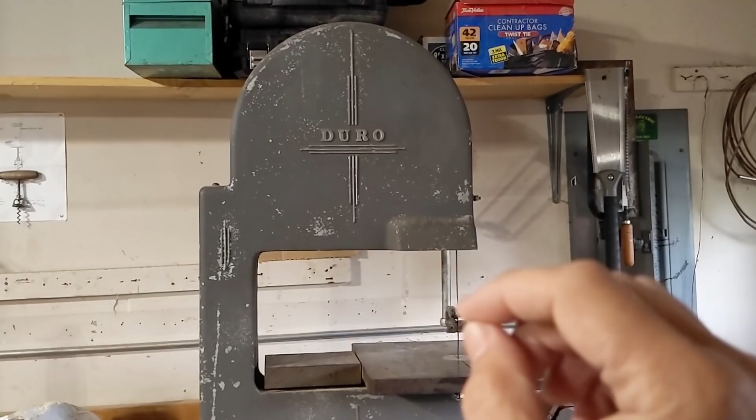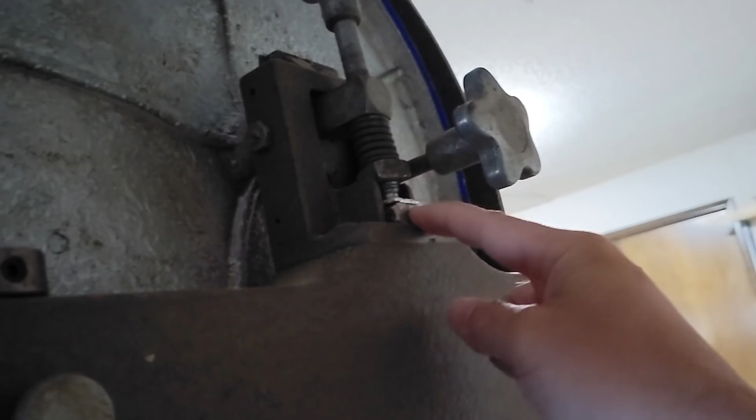I picked up this old Duro bandsaw project from somebody else, and that guy didn't do a very good job of it. He ordered bandsaw tires that are not quite strong enough, so it's easy to move them across the wheel. Also, these wheels are already crowned and the metal is fine, so I really don't need these tires. The problem is the blade length for this old Duro is 101.5 to 102.5 inches, so 102 inches would be ideal, and that's harder to find - it's not a standard blade length anymore. So I can understand why he got a blade that's too long, and he's had to put spacer blocks back behind there to get this wheel up, which has really thrown things off. So pretty much everything he did to get this bandsaw working needs to come out and be replaced.

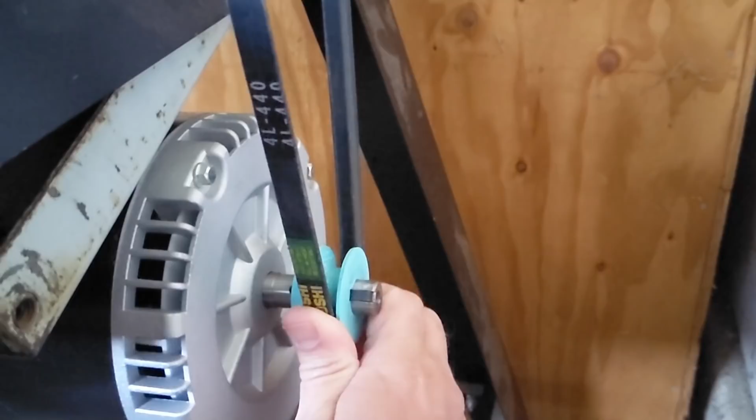He had a 1 horsepower motor, which was not nearly powerful enough, and I've replaced it with a Harbor Freight 3 horsepower motor, which required me to print up this small pulley. The RPM on this motor is about 3,700, so it's twice as fast as the last one. With this smaller pulley going to the larger pulley, I think I'll get a decent speed out of this bandsaw, about the speed I want.

In the future, I might 3D print a side-by-side pulley so I have 2 speed options. We'll see. But for now, this is it, and I need to do some testing, which means I need to wire up this motor. This is what I'm working with.

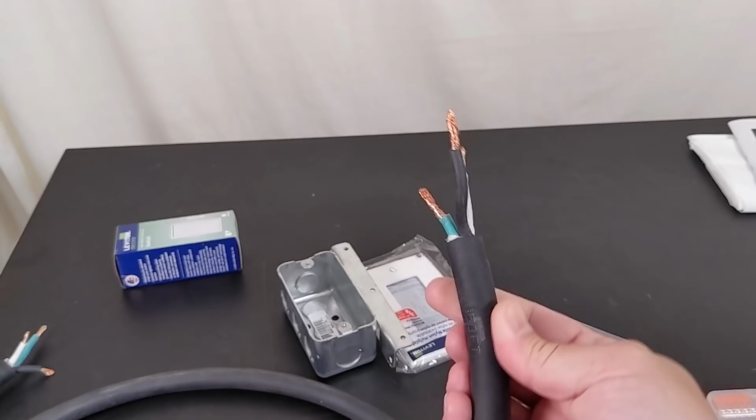I have 10 feet of 10 gauge 4-wire, like 220 volt soft wire. This is actually repurposed, and currently Home Depot is out of this stuff with no resupply in sight, so it must be another casualty of the pandemic. I don't know. So I'm going to have to get this stuff mounted.

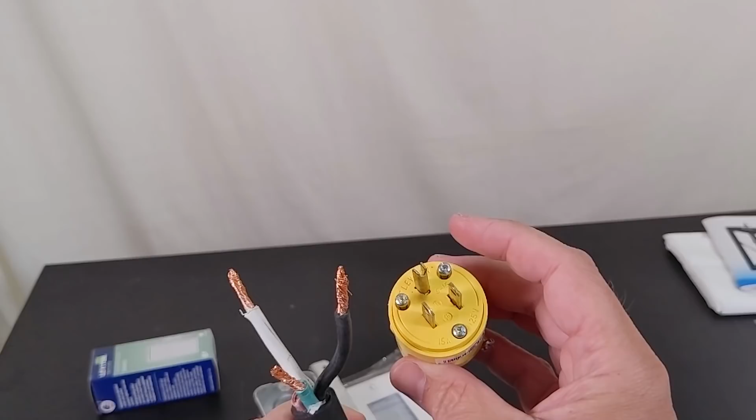Now I only need 3 of the wires, so I've got a 3-wire connector here. This is going to go into a 110 volt circuit. I've got this nice metal box here to hold the switch, and one of these rocker switches, which was pretty cheap - just like a standard rocker switch for your home, like the ones you've all seen for turning lights on and off. Why I chose this style of switch instead of the other style should become apparent pretty shortly.

The final thing to talk about here is the wire nuts - about $2.78. This is the classic way of doing it, but I'm not going to use these because I got my lever nuts in the mail.

These lever nuts are awesome, just super sweet for doing any sort of home electrical work. I think these are much more prevalent out there in Europe, but here in the United States we're just starting to see these being used, and they provide all the current ability - you can pass just as much amperage through these connectors as you can with a wire nut, and they're so easy to connect. You just pop the levers up, stick the wire into the hole, pop the lever down, and you're done.

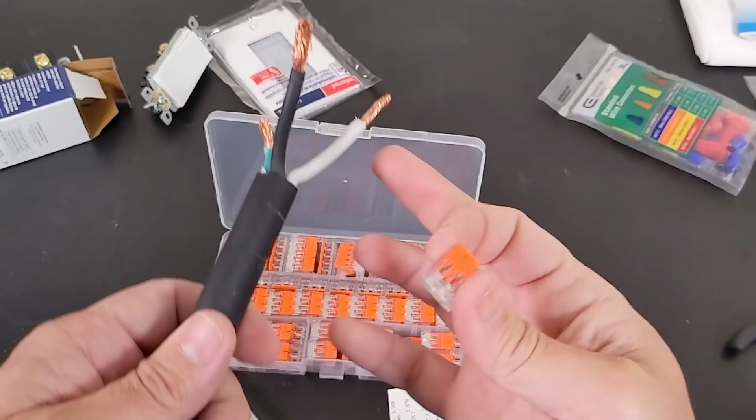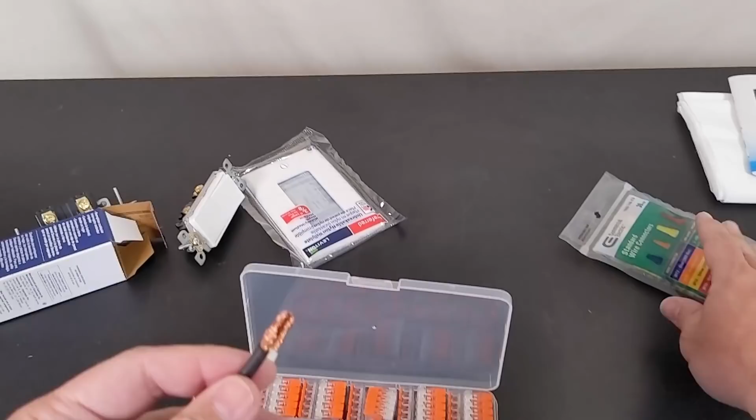Super, super clean. But these aren't going to work because I'm using 10 gauge wire here, and the lever nuts I bought are for 12 gauge and smaller. So I can't get these wires down inside of there, and I'm not about to trim them down just so they fit into the nut. I guess I'll be using these old twist nut standard wire connectors.

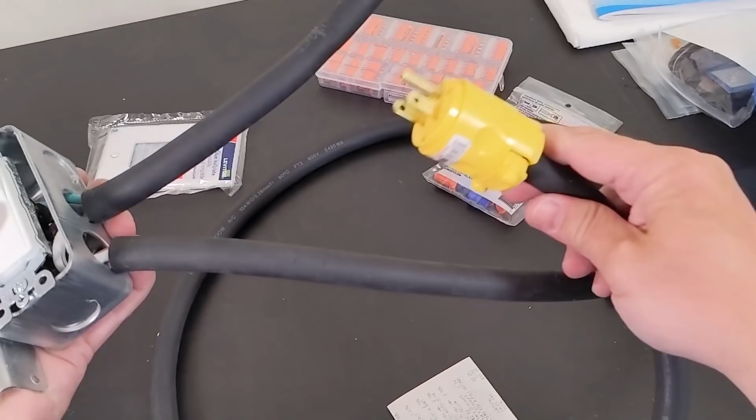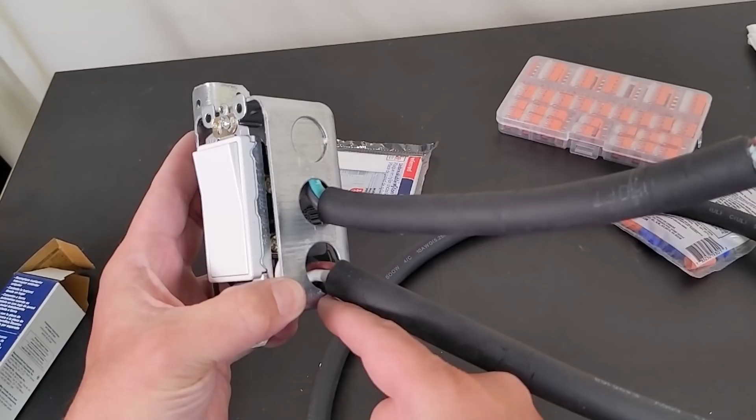All right, I got the switch in the box, all wired up. Got the pigtail here to go to the motor, and this other end goes to a nice 110 volt plug. This whole thing is going onto a bandsaw with a motor that moves, and there's going to be vibrations. This is a nice sharp metal edge with a wire that can vibrate and cut right into that edge, so that edge will cut right through the insulation on the wires and short circuit that thing. That would not be good. So what I'm going to do is 3D print a piece that pinches these 2 cables and prevents them from being vibrated until the metal cuts into them.

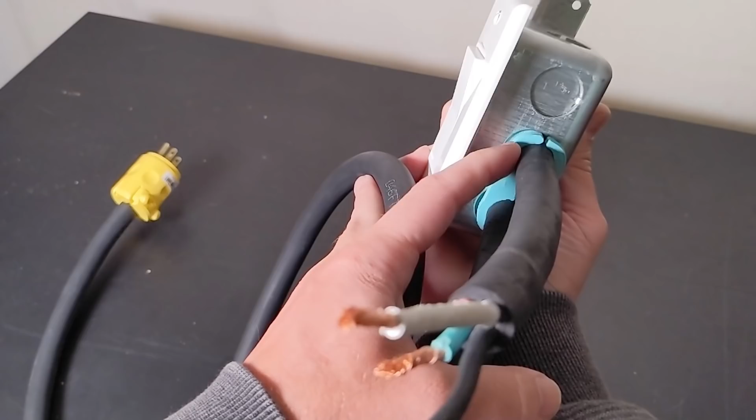I don't like my wire strain relief here - you can see it's not centered in the hole, which means the wire insulation is pressing up against the side of that metal box, and that's not good. So I need to remake the blue component here to provide proper strain relief to the wiring. This outer plate is going to get replaced by a 3D printed component. I mostly bought this because I needed those 2 screws.

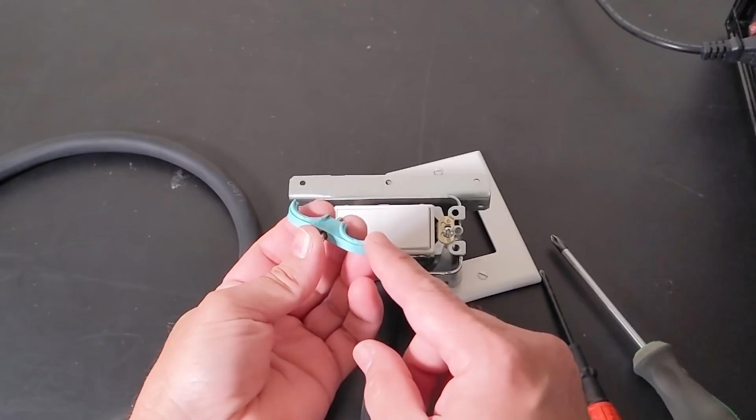This is the first design where the flange is the same thickness as that metal wall, and this is the replacement where the flange is much more thick. Now the wires are applying constant pressure, pushing this towards the outside, so it's not going to rattle in this direction, but it will rattle up and down in the holes, and that's what I want to prevent. Yeah, that's much better.

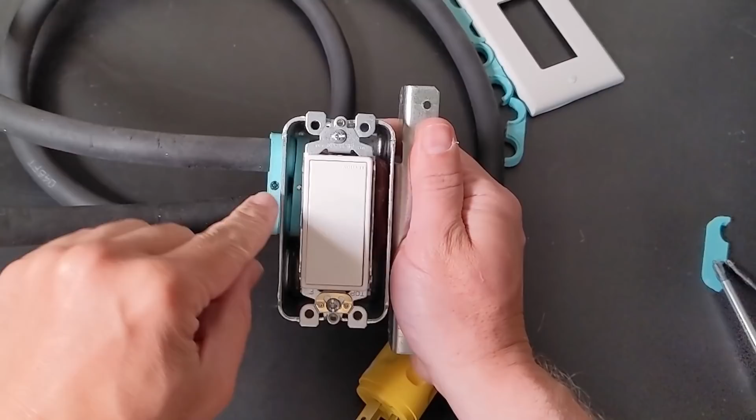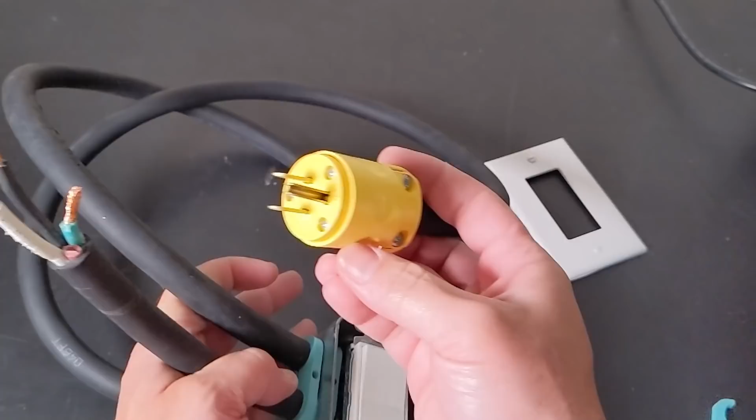You guys can see only the blue plastic is touching the metal, and there's really no movement. It doesn't move. It's a little bit cockeyed, that's because of the pressure from the wires inside of there, but I've tested the continuity with a circuit checker, and it's all good. The next thing to do is come up with a custom switch plate, and you're looking at what I came up with in CAD right there.

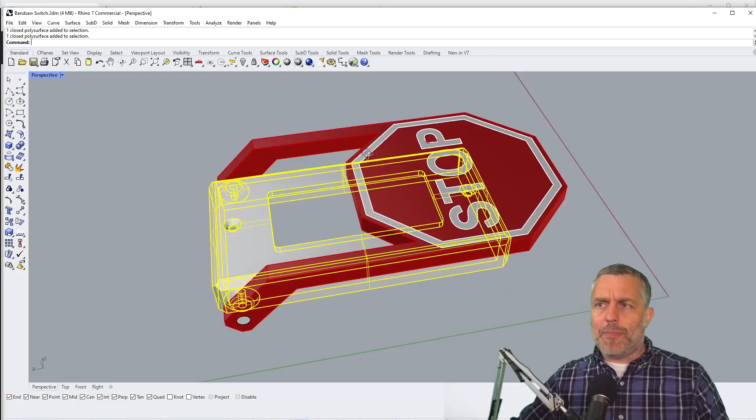So if I zoom around on this, you can see that the stop sign can pivot around the screws right there, and this thing prints in 3 pieces. Basically, you print this one all by itself, and then you print the stop and that outline. It's just 2 layers thick. So you print that and you leave it on the printer, you don't pull it off, and then you run a separate whole print being the red geometry here. And so the stop ends up being embedded in the red, and it just looks really nice.

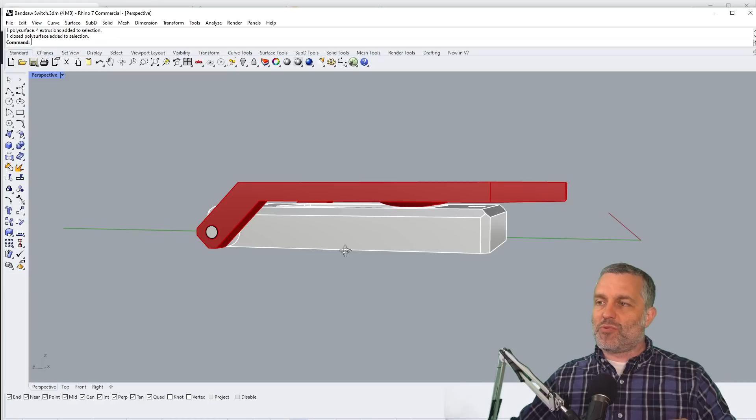You can see that the red has this bumped out portion down here, and that really just helps to activate the switch as I've designed it. And you can see also the geometry for my cable relief over there.

Okay, so I've uploaded this geometry to Thangs, and you can scroll around it. Really cool functionality that I showed you guys in Thangs before, and I was able to upload it as a step file, which allows me to have this functionality on the Thangs website. Really cool. So this is just available. Just search for stop sign switch, or go to design prototype tests, or find my username on the Thangs website, and you should be able to download this and use it yourself.

Now, I do need to say that this will only work on that same metal box that I have. So head into Home Depot, which is where I got it, and I'm sure they're going to have that same box in stock. But if you don't have a Home Depot near you, I don't know. It's kind of a narrower metal box, so that whole plate isn't going to be largely compatible with other things.

Now, the key here is that these switches are available elsewhere. Look at this ready-made version of it, enclosed plastic box, big old stop sign. I don't think it looks nearly as nice as mine does, but it's got all the functionality. The wiring is a lot smaller, so you're not going to be able to put custom gauge wiring in there. I don't know how many amps this is rated to, so you've got issues with these. Also, a big old price tag, $51 for that one.

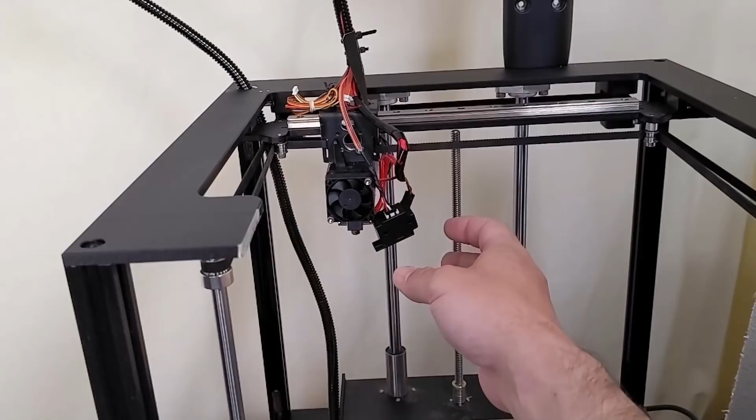This is meant to be printed in one go, but I printed this on my little Core XY machine, and it doesn't currently have part cooling on it, which means that I had some pretty severe problems with part peeling. So these ears here, I had to reprint and then just use a soldering iron to blend them into the original print that I had cut off.

All right, it's all done. Let's show these guys what we're working with. I used some Sharpie to color the top of the switch green, the bottom of the switch red. I've 3D printed this part here and the stop sign.

And hey, buddy, will you show these people how it works? Yeah. Okay, hit the stop sign. Turn it back on. There you go. And that's as simple as that.

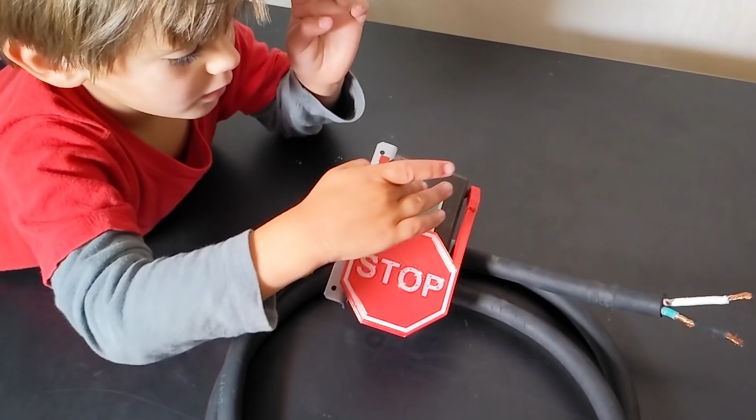I think it's good to have. I want to have one of these. I need to make something with it. Okay, but this doesn't make things, this just turns the machine on that makes the things. So maybe you can use your 3D printer to make things instead. No, the other bundle that you gave me, it doesn't work. The printer I gave you doesn't work? Yeah, so that's why I want this. I understand. Well, I'll tell you what, I'll make one for you. Of this? Yeah. Oh.

Now, Dad? Yeah. Can you draw green and red because I love, and can you put a stop sign on there? Because I love the stop sign and the switches, and I love the pipes and the wires. Uh-huh, so I want you to make it just like the wires and the tubes. Okay, I'll do my best. Okay, do your best. Thanks, buddy.

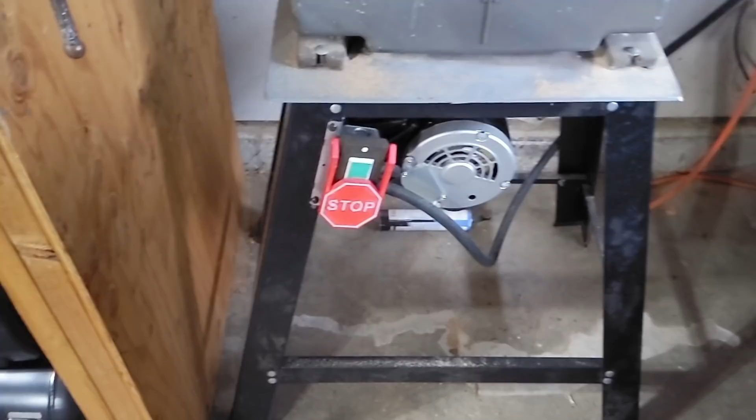Ta-da! There it is, working fantastically. It's a little bit noisy, but here, I'll turn it on for you guys.

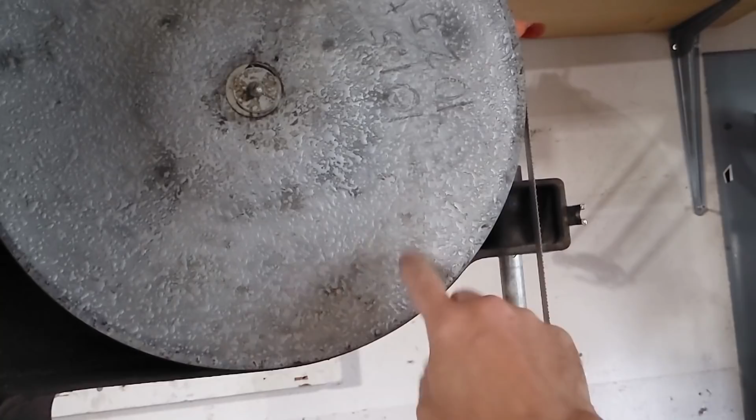This is right there at my knee height. This is the quality of cut that I'm getting. Pretty good, brand new blade. This is a hybrid style blade that I got from McMaster Carr. And you can see that I'm running this on the stock wheels, the old metal wheels that came on this thing. They are crowned, they're metal, and they're crowned, so they're going to be kind of noisy.

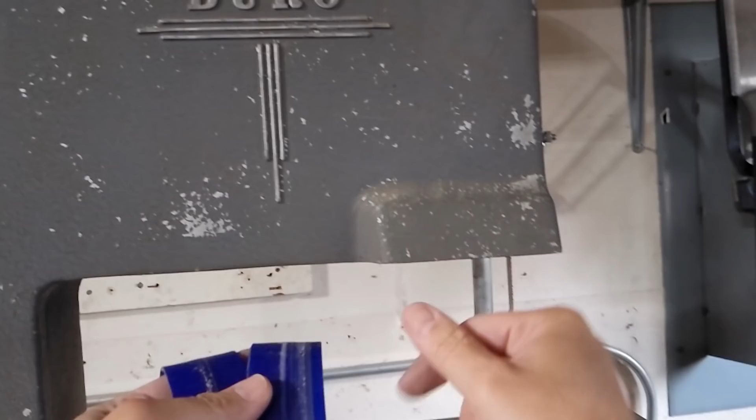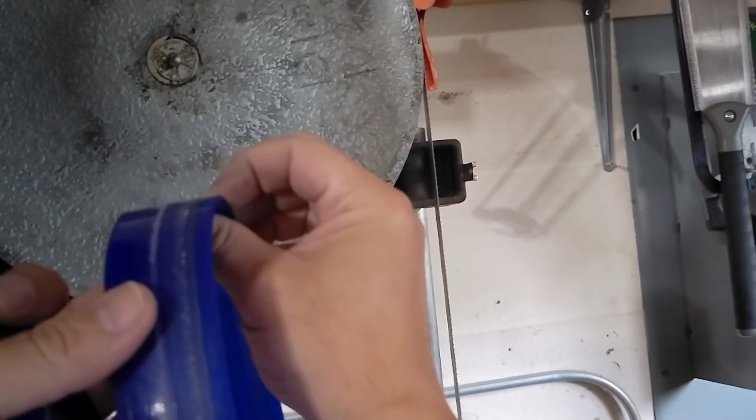But the tires that the previous owner who tried to renovate this thing put on the machine don't really stay on it, and they're wider than the actual wheels, and they migrate because this is already crowned. So the tires themselves are crowned, and so you've got a double crowning thing happening, which isn't good. So I'm just going to leave it real noisy like this. I could stretch a bicycle inner tube across the wheels here, but the problem with that is I would not be able to cut metal, and I do plan on cutting aluminum from time to time. This blade is supposed to handle both wood and aluminum.

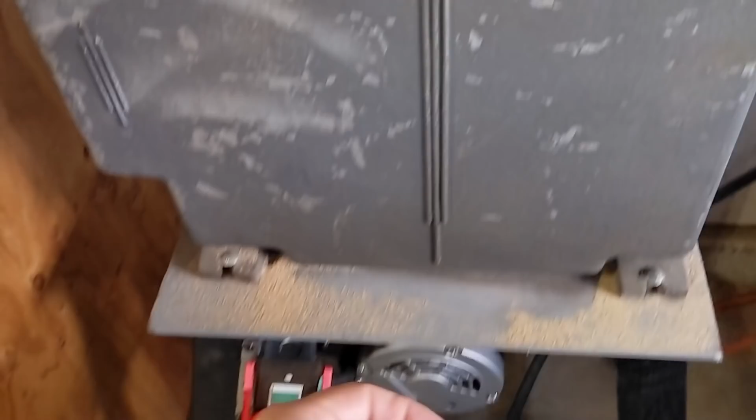So you guys just saw me really bog down the blade and bring it to a near stop, which is really taxing on the motor. And if I was going to trip the breaker, that should have done it.

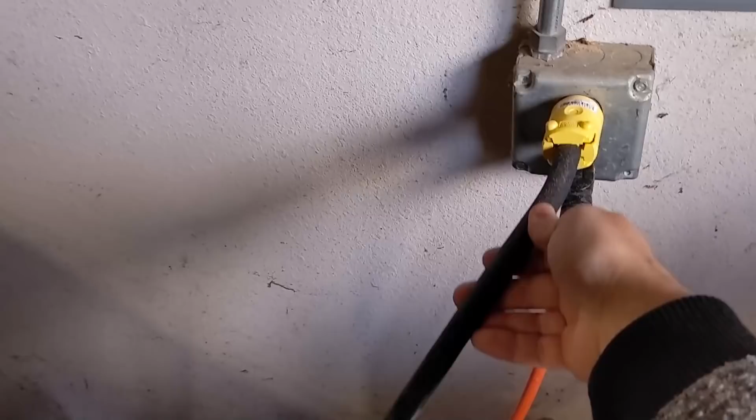So here's the saw, and there is the 20 amp circuit breaker in the box. There's the plug, but the line is longer than from the box to there because it goes down there somewhere. So we've got a good 20 feet of wiring inside the wall, on top of 9 feet of 10 AWG wiring here to the saw itself. And here's the manual that came with the motor. So the wiring diagram for this one, the 3 horsepower motor, is that.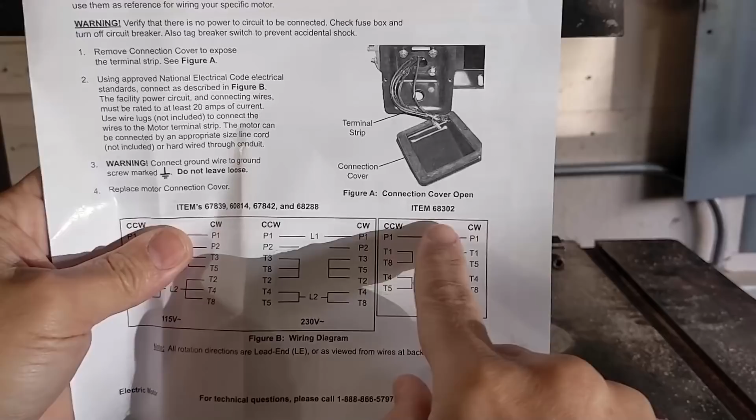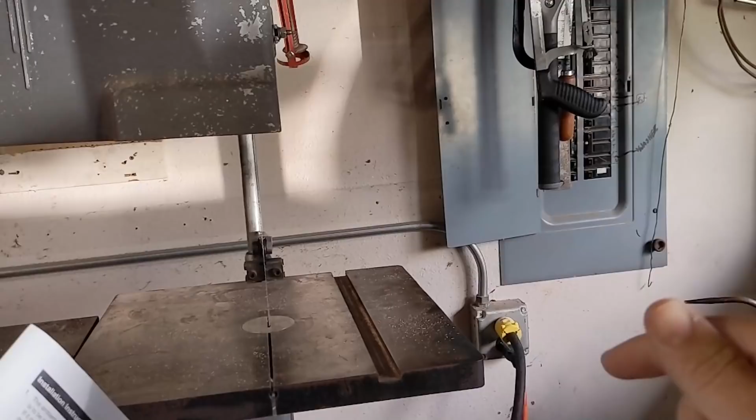And you can see this is meant for 230 volts, while I'm running it on 120 volts AC. And a quick note about that: 110 volts AC was the original standard proposed by Nikola Tesla. And Westinghouse, who was then embattled with Edison, eventually won. The Westinghouse-Tesla version of AC power delivery to homes won because it is the superior way to do it. But Westinghouse wanted it to be 133 volts, which is funny. So yeah, there's always been kind of arguments over the nuances there.

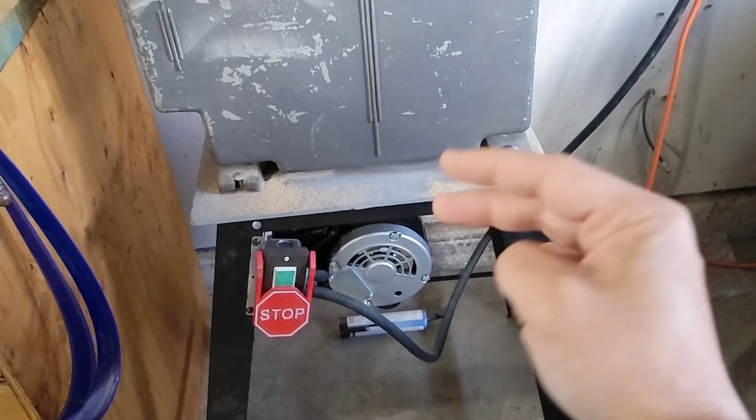So in America, we now have between 110 and 120 volts AC coming out of most of our outlets, although you can get 220 volt AC to your shop, and they even have 3-phase 220 volt, which is Nikola Tesla's baby. That was his invention, and also the better way to run things, which is why the best shop equipment always is 3-phase 220. So yeah, this motor is designed for 2-wire 230 volts, not 240, 230 volt AC, and yet I've shown that it's working just fine on a 20 amp 120 volt circuit.

Why am I not having big problems? And also, am I getting half the power out of that motor because I'm only feeding it half the voltage? To answer those questions, we've got to fall back on the most basic equation in electricity, and that is voltage times amperage equals wattage. This motor, we know, is supposed to run at 230 volts. If we look on the website, we can see this is rated at 12.26 amps, which gives us a wattage of rounded 2820.

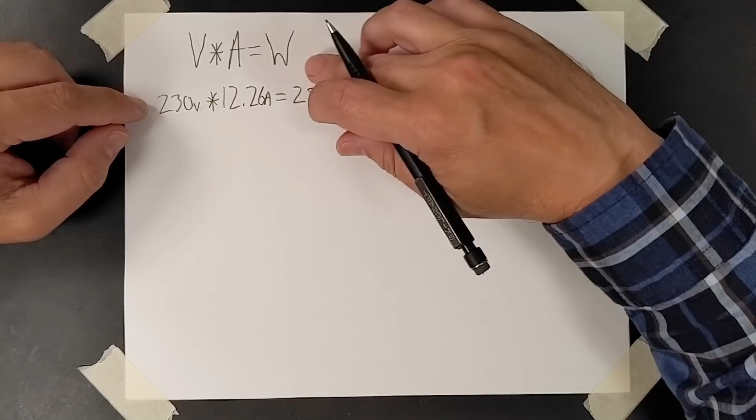Now, the thing to understand about an electric AC motor is that it pulls electricity through the circuit, it doesn't get pushed by the electricity. So you can't decrease the voltage and think that the amperage is going to stay the same and therefore the wattage is going to decrease. That doesn't work like that. The motor is going to demand all the electricity that it's rated at. So if it's rated at 2820 watts, that's how many watts it's going to pull, no matter if you're running it at 230 volts or at 120 volts.

So if we change the variable to 120 volts here, and we multiply that by an unknown amperage, it equals 2820 watts.

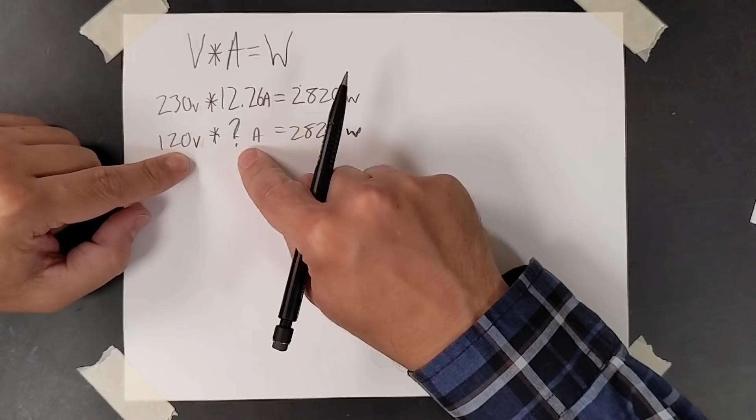Well, we can just divide 2820 by 120 volts to get our amperage, and that comes out to be 23.5 amps. That is more than the circuit is rated at. The circuit's only rated at 20 amps. So not only are we exceeding the rating of the circuit, at least the rating of the circuit breaker.

I don't know what wiring they put back there behind the wall, the Romex cabling going from the circuit breaker to the plug. I did use some very stout 10 AWG, 10 gauge wiring from the outlet to the saw. But who knows what the wiring is? Who knows what the actual circuit can handle? The circuit breaker itself is rated at 20 amps.

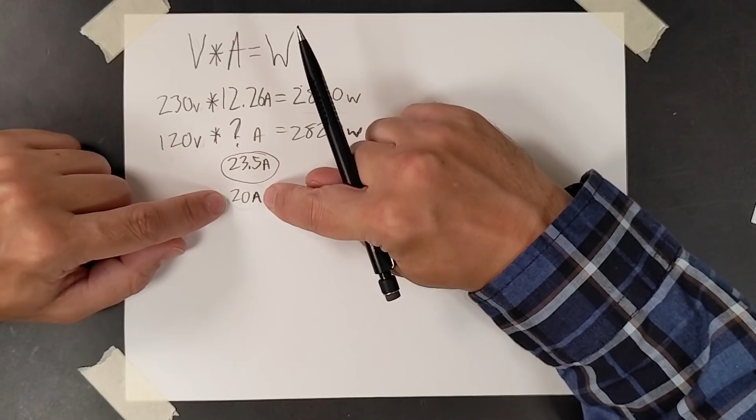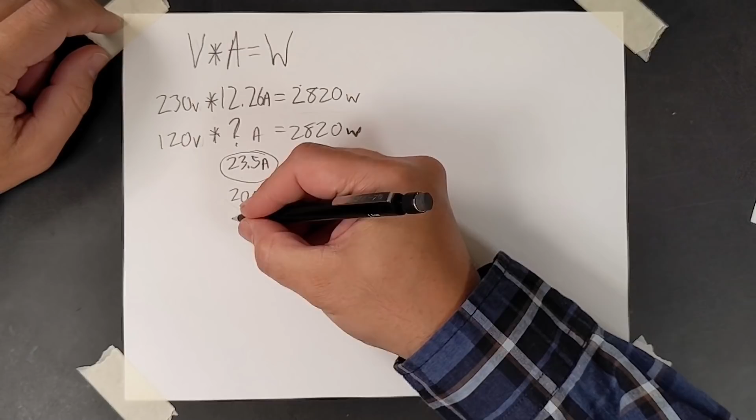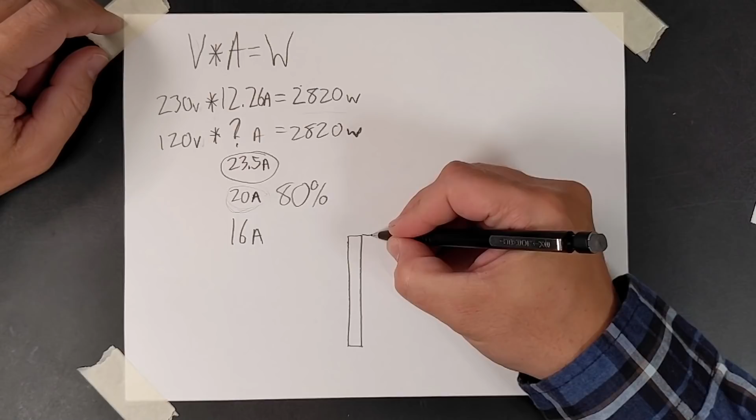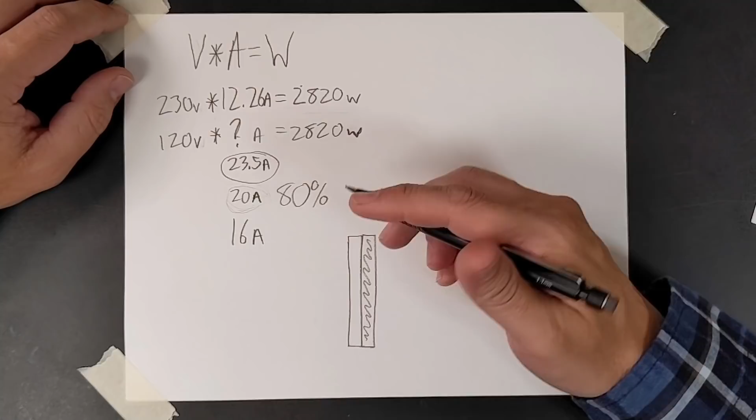The general principle of a circuit breaker is that you have two metals and they're bonded together, and one of them expands more in the heat. Putting electricity through a circuit will heat up the wires in it. Before they get red hot, they do expand quite a bit. So if we bond two pieces of metal side by side, one of which expands more than the other, then what will happen is you'll get a bend. Because as this outer one here expands more, it's got to travel a further distance than that. And so it's going to warp over.

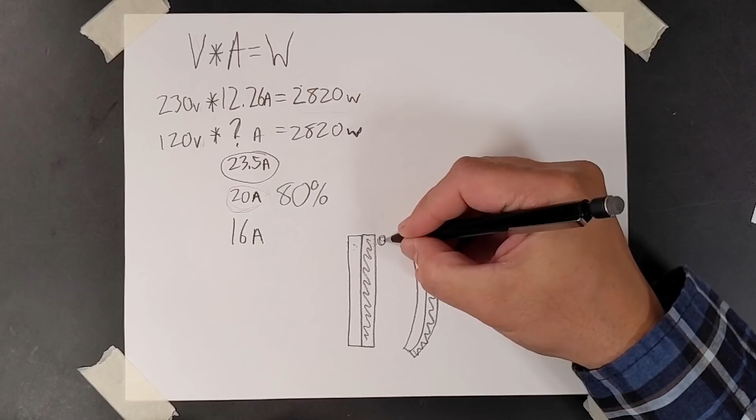You basically have a contact point here, and as it expands, it moves away from the contact point, so you no longer have electricity flowing. There's no place for it to flow because it's not making contact. So it takes time for the metal to heat up.

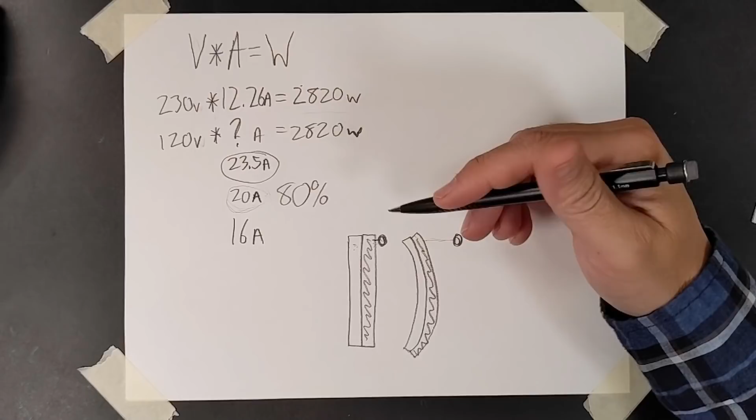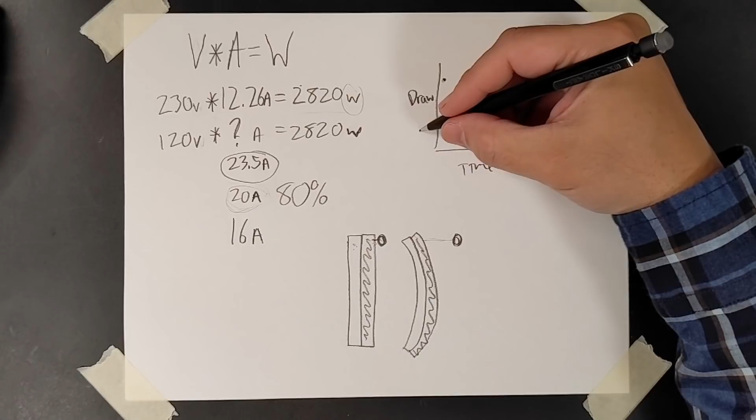So that can explain why instantaneously we don't just trip the circuit as soon as we try to draw this overrated wattage through it. And that's actually a good thing, that it doesn't instantly trip the second you draw more wattage than it's rated for, because electric motors on startup have a really high power draw. So if this is the time and this is the draw, they start off way higher than what they're rated at, and that very quickly diminishes in a parabolic fashion as the motor speeds up.

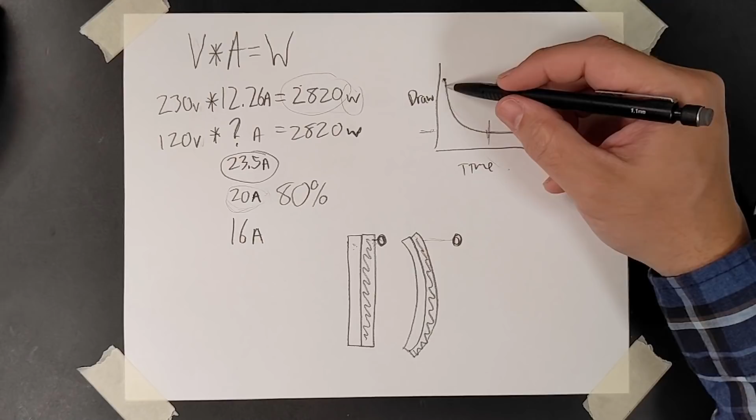As it gets to about full speed, it's going to draw the rated 2820 watts across there. But until that, there's a spike, and this spike doesn't last very long, but it's definitely there. So you wouldn't want your circuit breaker to instantly trip the second you drew instantaneously more than the wattage. So the fact that there's a delay on that is a good thing in general, but I'm definitely abusing that circuit.

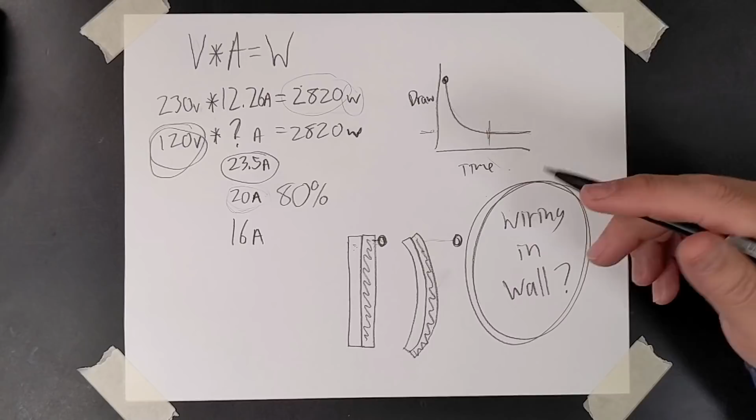Even though the circuit breaker's not tripping, we don't know the wiring that's in the walls. So that means I could really be overheating, just like the circuit breaker gets overheated. The actual wiring in the wall could be heating up and it could catch on fire inside of the wall cavity. Back to the 80% rule, I really don't want to be running this over 16 amps.

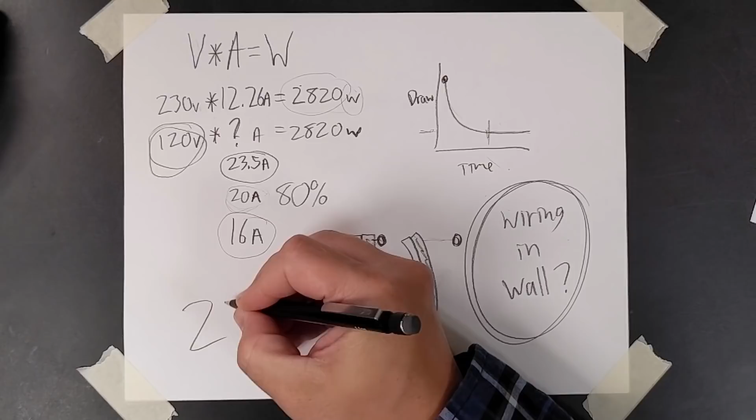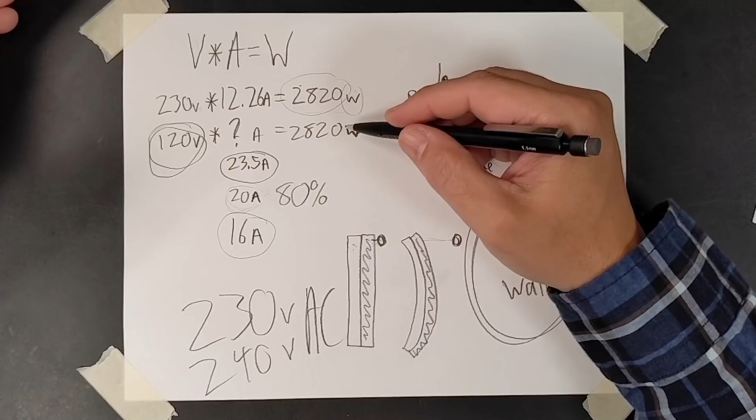So I absolutely must run this motor on 230 or 240 volts AC to do it right. There's nothing reasonable that I can do to lower the draw of the motor. It's fundamentally built into the motor that it's going to demand 2820 watts, which equates at 120 volts to 23.5 amps. I can't do anything to lower that draw of the motor.

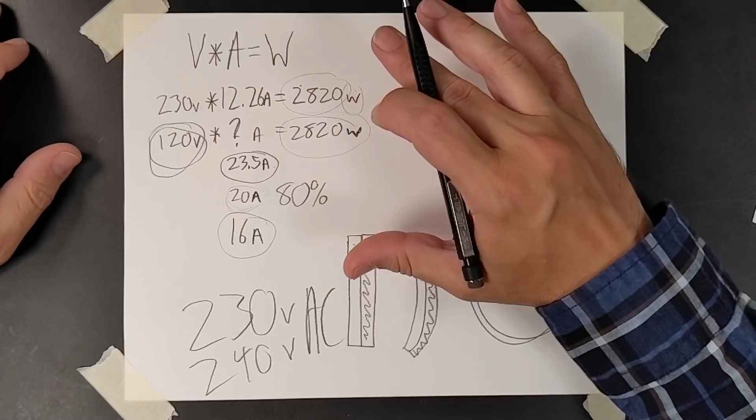I need to put a different motor on there, and the motor I had on there previously wasn't powerful enough. So in order to have the power this saw needs, this 3 horsepower is really quite nice, and it just means that I need 240 volts.

And we can see there's actually quite a number of 240 volt circuits. The range top, all of these heaters, there's radiant ceiling heat in this house. We've got, I don't even know what these are. So yeah, the dryer, all these are 240 volt circuits, but unfortunately every single slot in this panel is taken up.

Normally, you'd have some empty slots, and I'd be able to, if I had two of them, I could easily just wire in an outlet, stick an outlet right here or right there with 12 inches of wiring to plug the bandsaw into.

And I can't do that because this is not my house. I rent here, and the landlord has not really been thrilled about the idea of changing up the wiring. It's a nice house, but he doesn't want to make any changes or help me out in this regard. So, it is what it is.

Here's the thing, you guys. I just ran all of these cuts. These are ripping cuts.

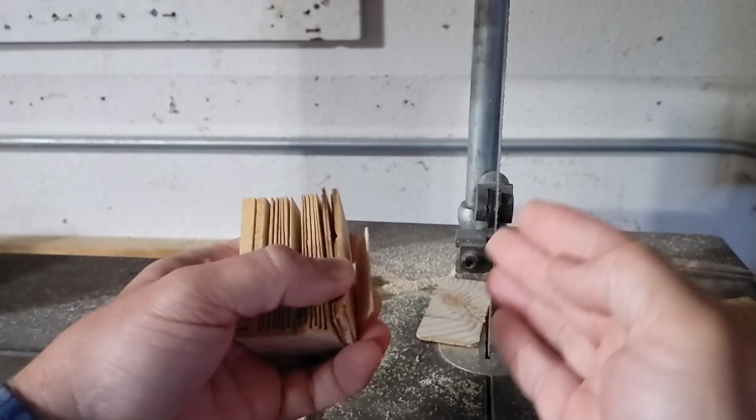These should be harder for the saw to handle than cross grain, and I ran all those cuts back to back. At the very end, I pushed until I bogged the motor down to a full stop, and that did not trip the breaker. Then I turned my air compressor on and did these cross cuts, pushing really fast until I stalled the saw out and stopped the blade.

It took me a few minutes to make all of these cuts, and I'm not seeing an actual real life problem here, especially given that I could run the air compressor on the same circuit, which is going to be drawing a significant amount of power. So why am I not tripping that breaker? It's kind of a mystery.

One possible explanation is that this could be one of those rare instances where low quality Chinese components is a good thing. They claim those wattage numbers, but they could be 25% lower than what they're claiming, which would mean this is only a 2.5 horsepower motor. But hey, it's doing the job—it's cutting quite nicely and it's not popping the circuit breaker.

So I don't have to sweat it that I don't have the right 220 power going to the saw. My final option would be one of these heaters I don't use—like the heater in the laundry room with ceiling heat. I don't know if it has its own circuit or shares one with another room. There's like 1, 2, 3, 4, maybe 6 heat zones. It's hard to tell, so maybe I can use one of those heaters we don't use.

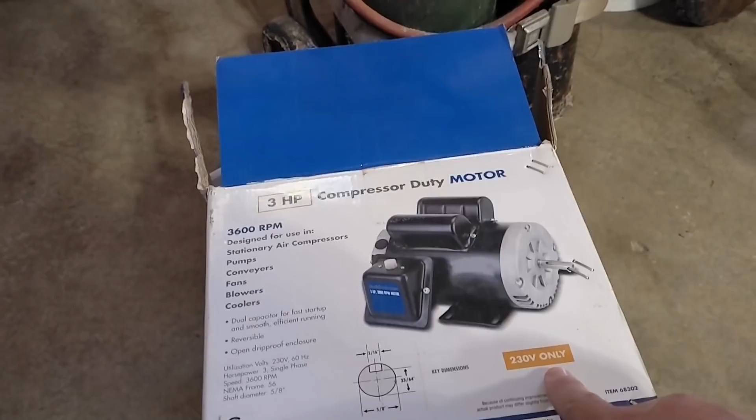So when the box says 230 volts only, it could be that the engineer who designed this motor knew that the maximum circuit you can get for 120 volts AC in America is a 20 amp circuit. He did the math too and knew that 23.5 amps was going to be required with a 120 volt circuit. So that could be why it says this.

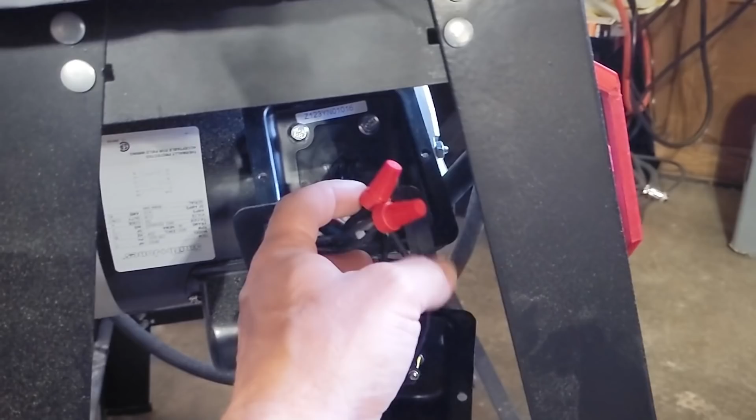Or it could be the wiring right here—the wiring going into the motor itself. You can see my white wire has 2 wires going into it, but the other wire, the black 10 gauge wire, only has a single wire coming from it, and that's dropping down significantly inside. I'd say that's about half the wire gauge there. And then, of course, there's the actual coils, the windings on the motor itself, and maybe those can't handle 23.5 amps.

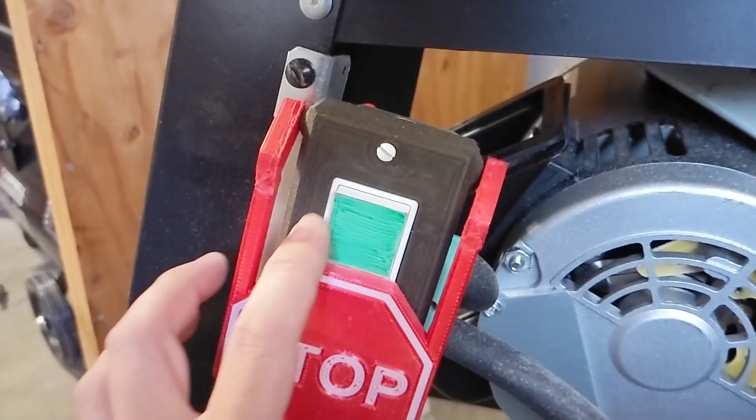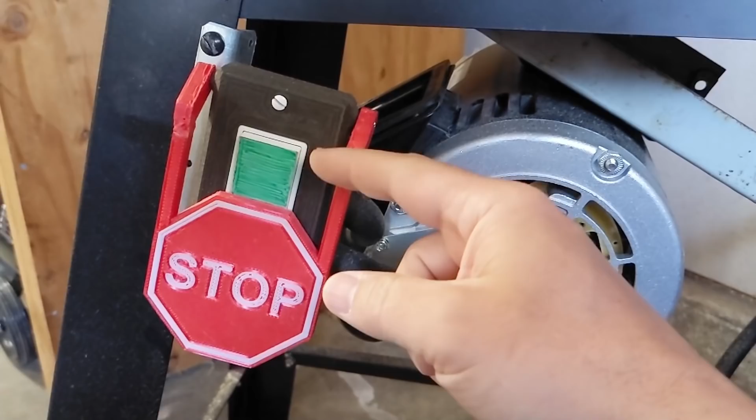Also, what about this switch? This is a 15 amp switch, and I'm currently running 23.5 amps through it. So if I can get 240 volts into the saw, then this will only be running at 12.26 amps, which is well below the rating of the switch, and everything will be good.

But sketchy as this whole electrical experiment has been, the only casualty has been this PLA pulley that I made. So what happened with this pulley here? It's not too hard to figure out.

Basically, it's too small. All these V-groove pulleys have a V shape to them, which corresponds with the V shape on the belt, if you took a cross-section of it. As the belt sits into the groove, it's wedging against the walls of the pulley, so the actual bottom of the pulley doesn't engage with the belt—it's the walls. With this belt, you can see it wants to spring open; it doesn't want to stay in a nice tight form around that pulley, so the belt itself is trying to disengage from the pulley.

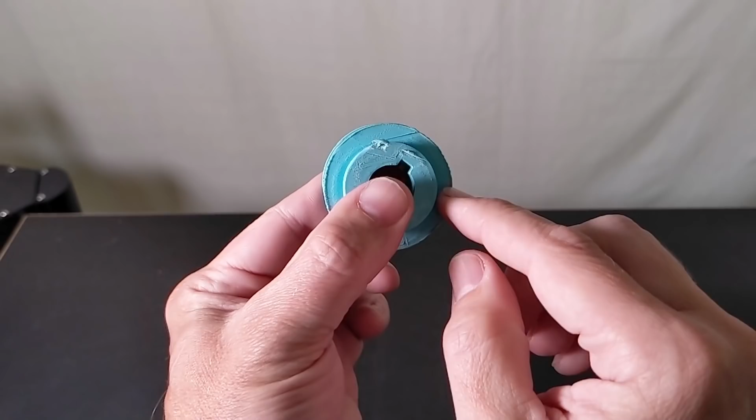Now, the weight of the motor is kind of forcing it around there, but it's not great. Also, because there's just a small pulley here, we don't have much of a contact patch for that belt. The contact patch is always going to be roughly half the circumference of the pulley, and in this case, being a really small pulley, that's a really small contact patch. So a larger pulley would make for a larger contact patch.

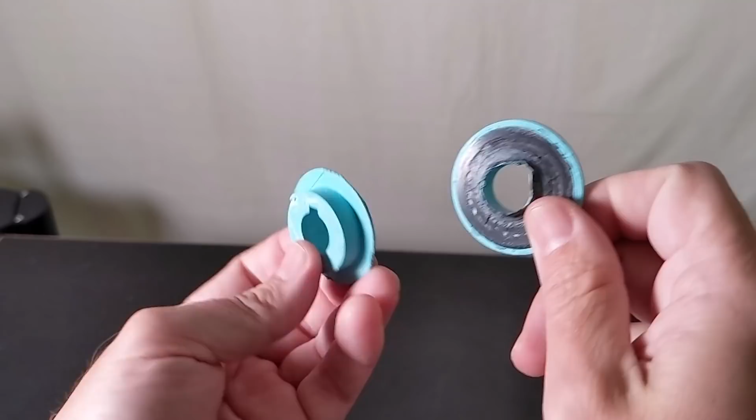I suspect that even if I got a metal pulley at this size, I'm still going to get that slippage, which won't destroy my pulley since it's metal instead of PLA plastic, but it will destroy belts. So what can I do about this? Well, my first inclination was to reprint the part with some carbon fiber impregnated nylon filament. I've got that fancy all metal printer going, and I can get really fancy and make a much more structural pulley, but this was never supposed to be a final product—it was a test to see if I liked the saw speed with this small of a pulley.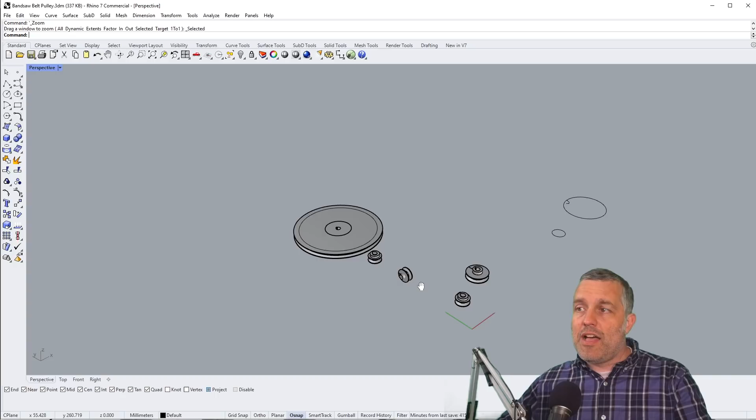More than that, it revealed that I'm going to get slippage on a tiny little pulley like this. So I could redraw this pulley, make it bigger, and print it with a really high temperature filament like polycarbonate, or even carbon fiber polycarbonate. That's pretty fancy, it would probably survive just fine. But that's some expensive filament.

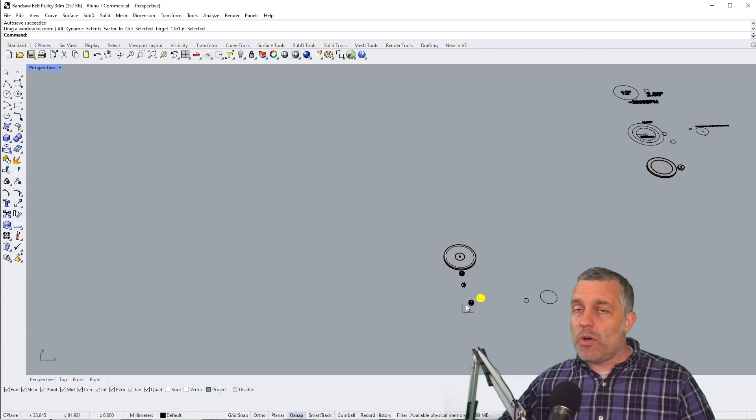That is quite a bit of work to slice and make sure I'm not going to get bed warpage. Now that the part is larger, it could peel up off the bed, and I don't have a heated chamber yet. So yeah, it's a lot of work. And why would I do that work when I can just go online and order the part for $8.58?

So yeah, I'm not here to reinvent the wheel, you guys. 3D printing is awesomely empowering, but it doesn't mean that when your only tool is a hammer, everything looks like a nail. Well, this is not a nail.

This is time to get a metal pulley that's going to stand the test of time and that we know will work. Now, looking at all these circles up here, you can see I was playing around with pulley diameters, trying to get an optimal gear ratio. I do like the way this was cutting, it was pretty good going through wood.

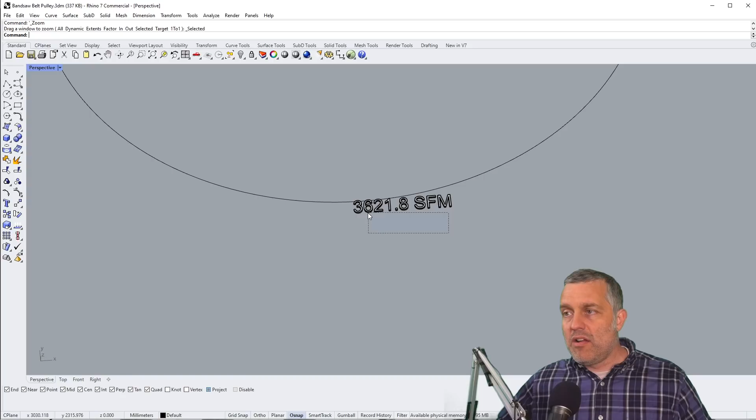And the stock gear ratio there is 3,621.8 surface feet per minute, SFPM. So that's pretty decent - right around 3,000 is what I'm aiming for. Looking at the forums online, a lot of guys say that's the optimal speed for cutting through wood.

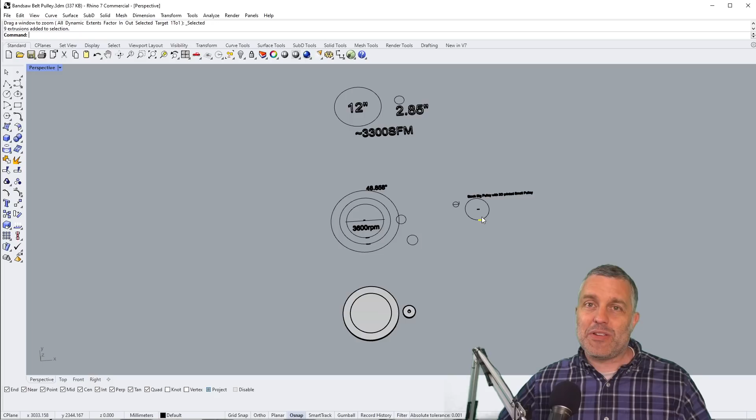Now, I do have to say, after this research, I set out with the goal to be able to cut both wood and aluminum with this saw, but it's not going to happen, you guys. 3,000 surface feet per minute is too fast for cutting aluminum. So I'll probably have to get a secondary small bandsaw for cutting steel and aluminum.

The wheels of the bandsaw, where the blade touches, are 48.858 inches in circumference. So I can multiply the RPM by that and get my surface feet per minute. After doing all the math, I figured a 2.85 inch pulley would give me a better contact patch than this one, so it would be decently sized.

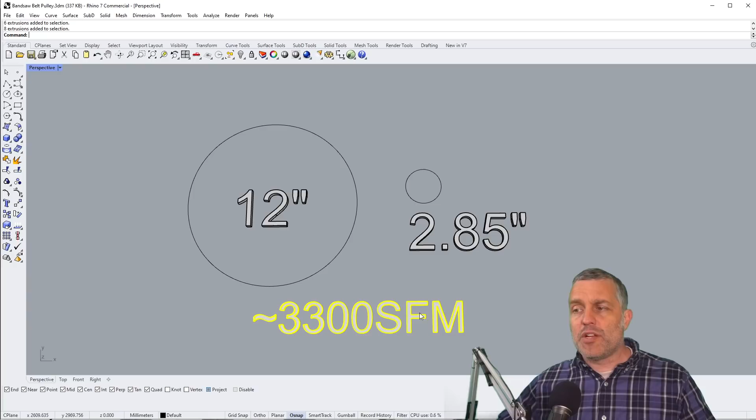Going with the very large 12-inch pulley attached to the saw gives me about 3,300 surface feet per minute, which is a little high - I'd like to be lower than that. So I think I can get away with a 2.5 inch pulley instead, a little smaller, which should give me right around 3,000 surface feet per minute on that saw blade speed. I think this is going to work out.

Unfortunately, I have to wait for these pulleys to come in the mail. All right, so where to from here?

Well, I need to get an electrician out to the house to potentially put a 240 volt plug right there underneath the circuit breaker box. I've wired houses up before - one house that I owned and another that the landlord gave me permission to wire when I was in construction, with electrician friends advising me on the job. So I could do it, I know what needs to be done, but it's got to be above board - licensed, bonded, and insured.

So that's something I'm going to have to wait for, it's like a 2-week wait, maybe a month out until you can get an electrician to come around, because the trades are in high demand these days. So that's going to be a while.

I'm going to get my pulleys next week in the mail, and if I can't get this thing rewired, I guess I'll just install a different motor. I'll go to Harbor Freight and get the smaller motor that won't trip the breaker - although this one isn't tripping it, and I don't use it very often, so I might just keep it as is, unsafe and code-violating as it may be. I'm not going to do any major projects with it until it's wired into 240, but yeah.